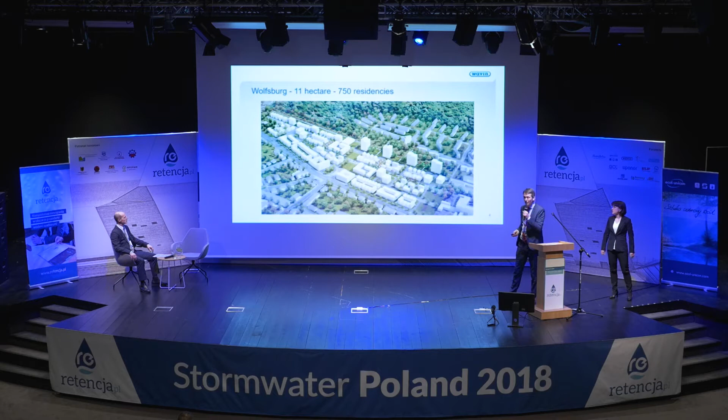About 750 residences will be built there, and it's totally redesigned. It's really a mixed area, an urban quarter for different kinds of people, different kinds of houses, and this is done with high ambitions.

It has a focus on climate. It should be climate proof, nice to be in, harmonious. It should be a place where people meet each other, a nice atmosphere, not only being together but also experiencing nice temperatures—not too much heat, not too much drought.

And that resulted in a few ambitions. One of them is using durable and recyclable materials—something we like to contribute to. But also other things, like having ecological habitats, using natural resources like solar energy or district heating.

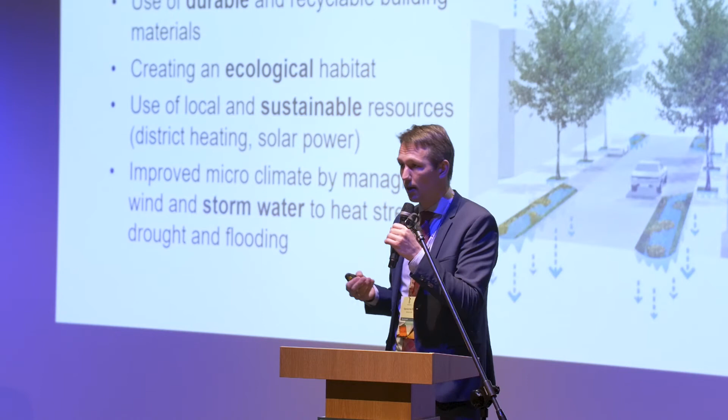If we look at the microclimate, that's also thought about from the landscape architecture, and we wanted to contribute to that. The design lets wind in during summer while blocking the winter wind direction, keeping it as cool as possible in summer and as warm as possible in winter. But also from a stormwater management perspective, that was looked at.

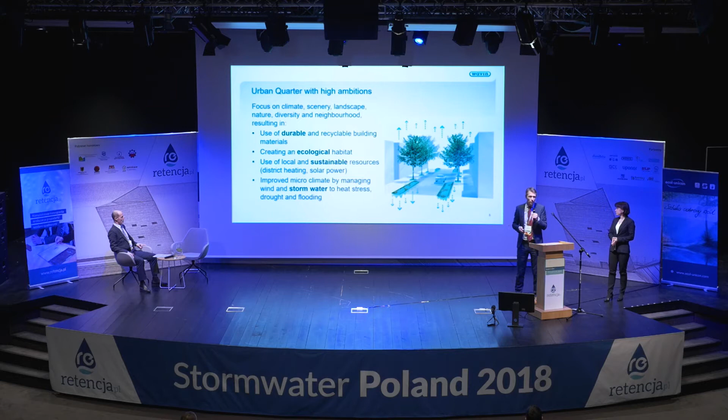And that is where we joined hands with the designer. It took us about 2 years to go through this project. We started thinking along with the design company and the municipality: what are the ambitions, and how can we solve this? How can we make sure this is really a nice atmosphere, a high-level building area?

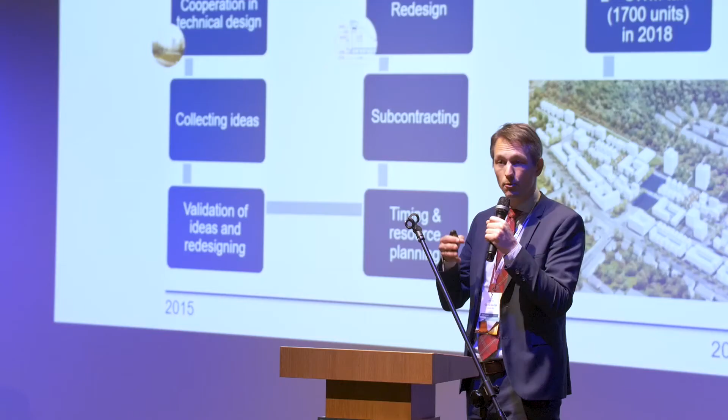So we went through the whole process. Having contracted the process, we needed to redesign. We continued, and last year we were happy to deliver a big storage tank in the middle, the center of this new area. So let me explain the total concept.

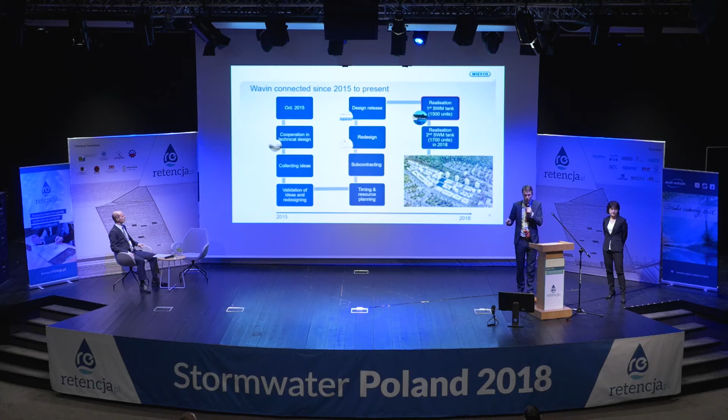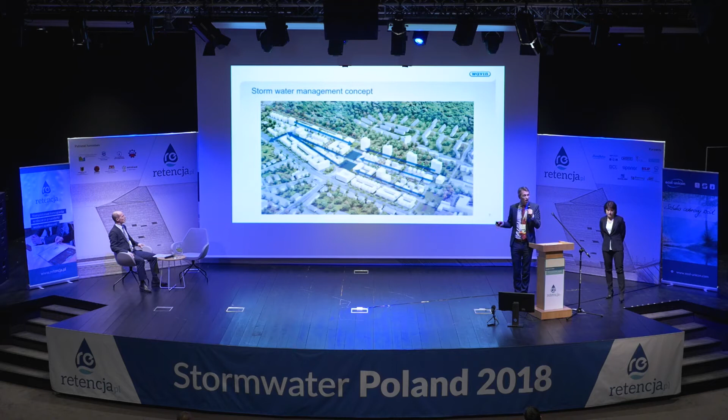If we look at this area, it's designed so that water is collected in the center. Water is collected via surface flow, guided by unpaved areas, so it can infiltrate when possible, is delayed when possible, and evaporates. But when there's high rainfall, all the rain will eventually get to the lowest point.

These lowest points are the blue squares in the center—actually these blue points are green points, because they are green areas. These green areas are the lowest in the quarter, and all rainwater flows onto that field and infiltrates. Of course, the capacity of infiltration into the soil is limited, so we enhanced this.

Below this area there's a big storage tank made of modular Q-Bic Plus units, which you see on the left, covered in an impermeable foil. In this way we can attenuate the water infiltrating through the ground, and this helps us create a storage of about 20 millimeters.

I made a small calculation when we had a presentation about Gdansk, which is more or less the same if you look at the 700,000 cubic meters of retention in this area. If you scale that down to this size, you come to about 1.3 thousand—so it's even comparable.

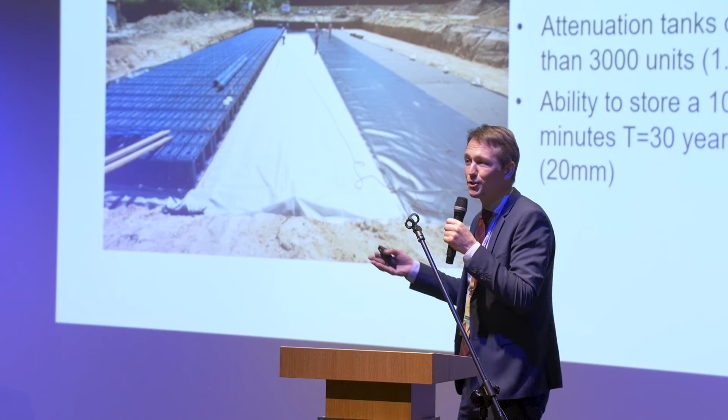If you look at the system as a whole, you have a green field, which is a nice place to live, where water is collected and can evaporate, but also infiltrate. By being infiltrated, it is also cleaned. Then it is attenuated in a big tank, which can gradually discharge the water into the drainage system. In the end, it creates clean water, a safe environment where flooding is prevented, and at the same time it contributes to a comfortable microclimate.

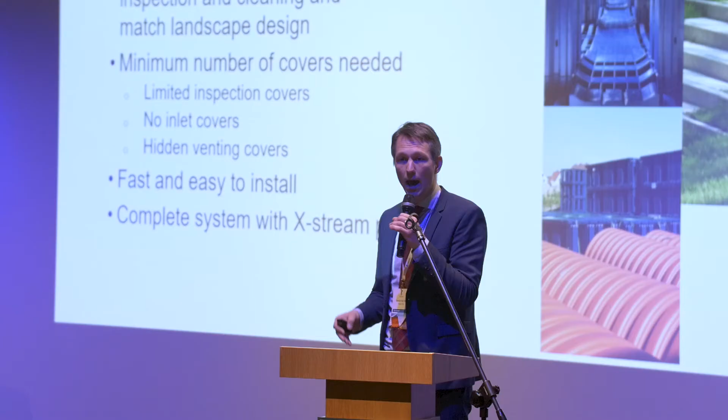We used the Q-Bic Plus solution, and if you're more interested, I invite you to our stand for a closer look. The nice thing is that it also fits the wishes of the landscape designer, because from one access point you can go through the system in two directions and look through it, so you only need one access point. Due to this open structure, it's very flexible where you put this access point, which was important since we have a playground and want people to feel comfortable with a design that looks nice. If there were cast iron covers everywhere, it wouldn't look as nice. This high design freedom helps adapt to the landscape designer's wishes.

Another benefit for our installer is that this is a very easy and simple system to install, very fast. And as we're also a producer of plastic pipes, we can provide a total system solution.

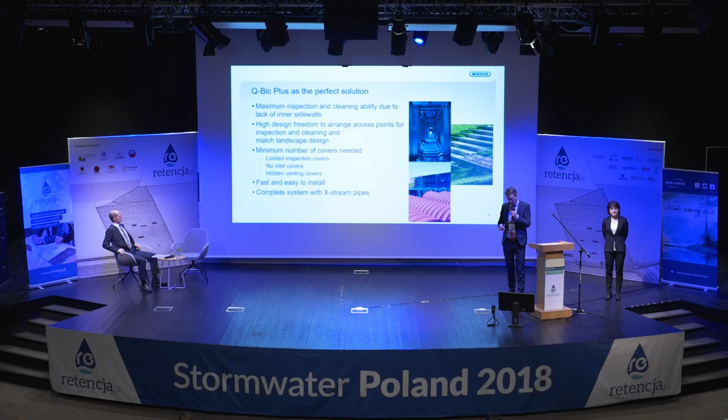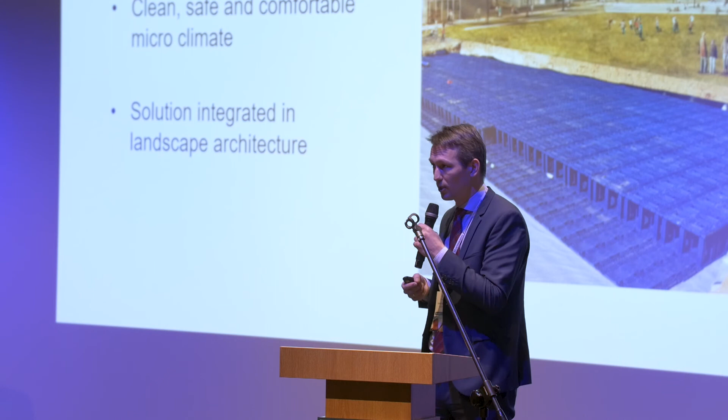Let me wrap up and summarize. In this project, we really wanted to be a partner for a good water management solution for this area, providing a clean, safe, healthy and comfortable environment for people to live in, which is also in line with what our architect and engineer wanted. It was really a cooperation to get this project done, and we're very happy that we could do this. We're looking forward to installing the next phase, coming this year. If you want to know more, feel free to contact me or Agnieszka, my colleague.

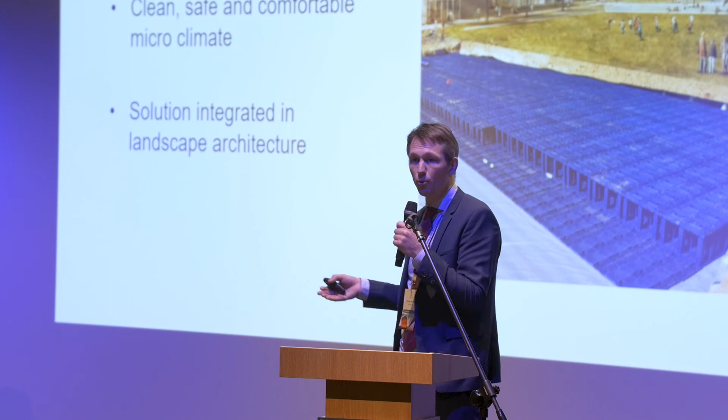This is, of course, a project which we have done in Germany. We work throughout Europe, but also in Poland, and Agnieszka would like to share some examples of that with you as well.